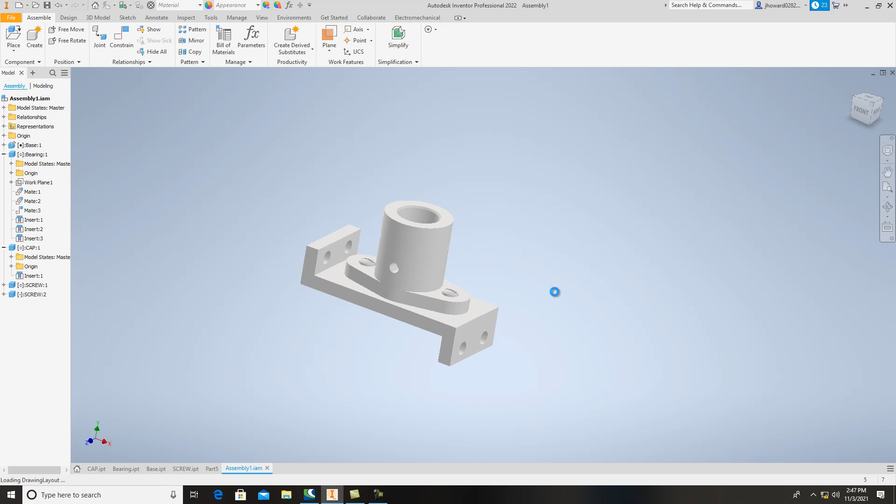And I bring it up here, and there is, of course, the paper it brings in. It's brought in a D size paper as default. Okay, I want a B size paper. All right.

And what you do is you come up here and right click on this sheet. There's Sheet 1. I want to right click on it, and I come down to Edit Sheet, and I want to change this to B size. Now with B size sheet, I don't need a name on it, but B size is okay. So I hit OK on that, and there's my B size paper.

I've got my zones on here and everything, so everything's looking good. This title block is really big. If I want to get rid of it, I can just right click on it and delete that. And you've got drawing resources up here, and I've got a title block. So I just go get a regular size ANSI A instead of the large, and it works a little bit better. So I got more room.

With that, what I want to do is bring in that Inventor Assembly, the IAM. And to do that, you come over here to Base, and it automatically picked it up right off the bat. I didn't have to go get it.

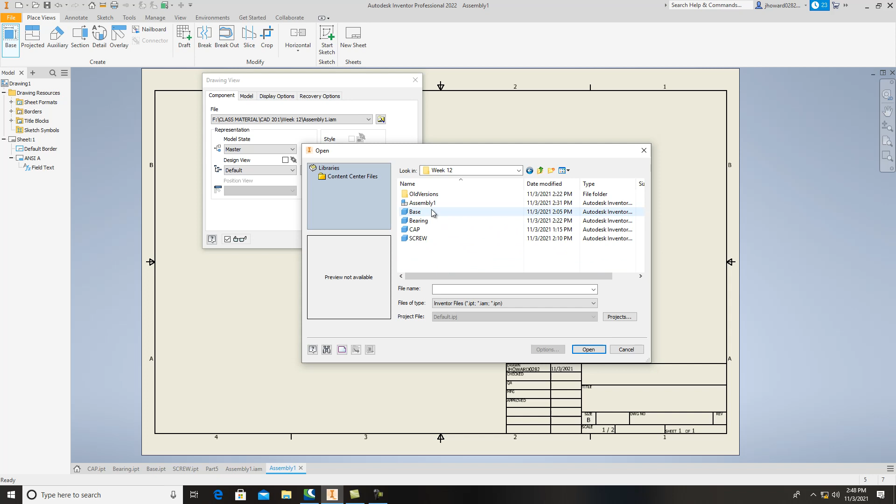But go here to my drive, keep everything nice and neat. And when I come down here, it was in week 12. Here's my assembly, open. And you can see it brought it in here just like that.

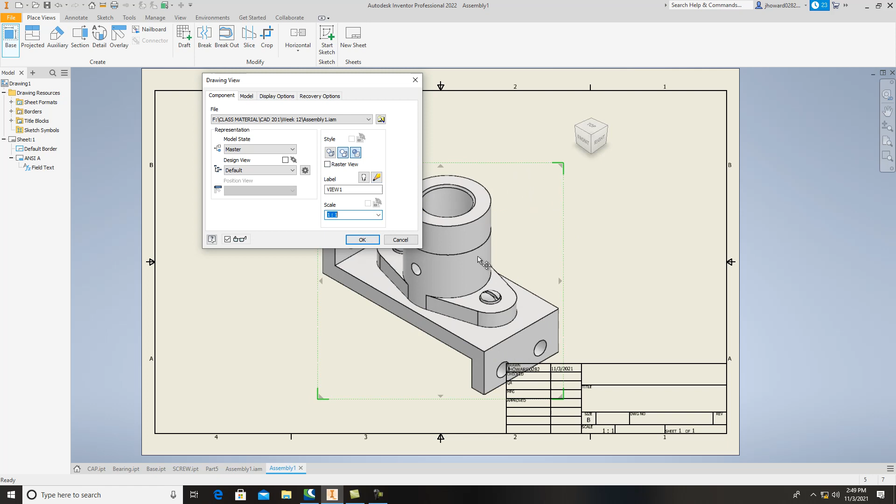It's perfect. What I want to do is turn it to isometric look. So I just turn it like that by clicking on my view cube. Looks good. I want to take and make it solid, shaded, just like that. And let's see if I go 1-to-1, see what it looks like. That looks pretty good. All right.

Then I can just take and move it wherever I want to. Now this is going to be my first page, and I need to put myself a, well, not necessarily on this one. We will in just a moment, but we'll leave this alone right here. And of course, you guys need to fill in your title box, and everything.

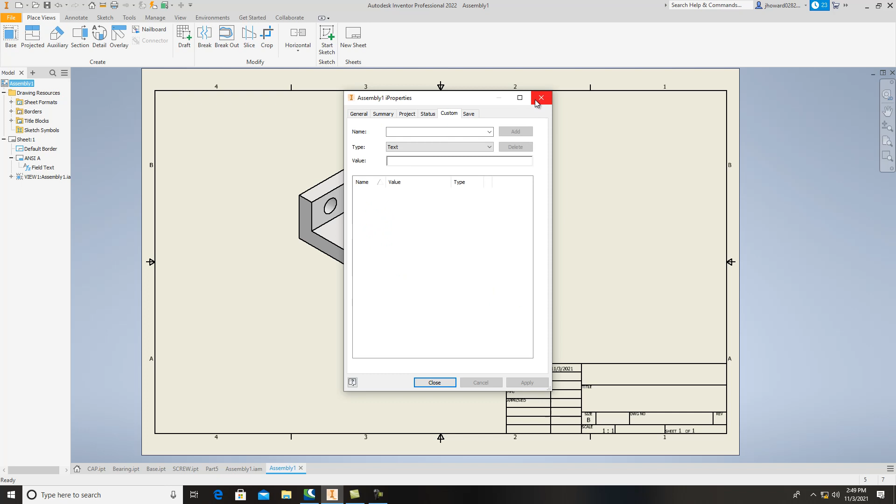You can right click on the assembly up here and go down to iProperties. And you can add in your title, your name, company, and all those things like that. The project number, stock. I mean, everything can be put into here, okay? And I definitely want you to put in the title for this and a few things like that.

So I'll leave that up to you to get all that placed in there. But for us, I want to add another sheet in this one, and I right-click right here, right on that top assembly, and do New Sheet, and it puts me in another one. If you'll notice now, here's Sheet 1, this is Sheet 2, and this is going to be my exploded view. My bill of materials will be right here.

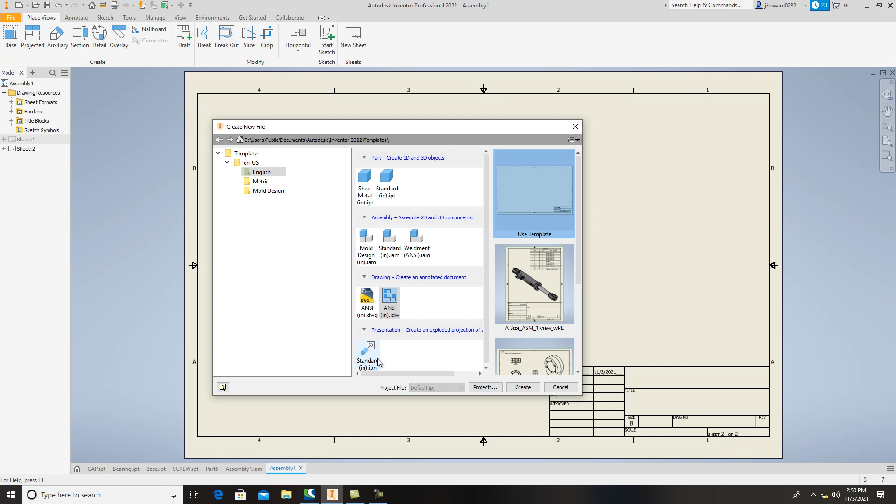To do that, I'm going to have to go in here and go File, New, English, and I want to do an IPN. Well, I double-click IPN, I can go in here and first I got to find an assembly that I have, and it's going to be the one that we just made. So come in here, have yourself organized really well so you can find it really easily.

Here's my assembly. I bring it in just like that. Boom. Now what I want to do is come in here and do what's called tweak components and show how this thing's actually assembled.

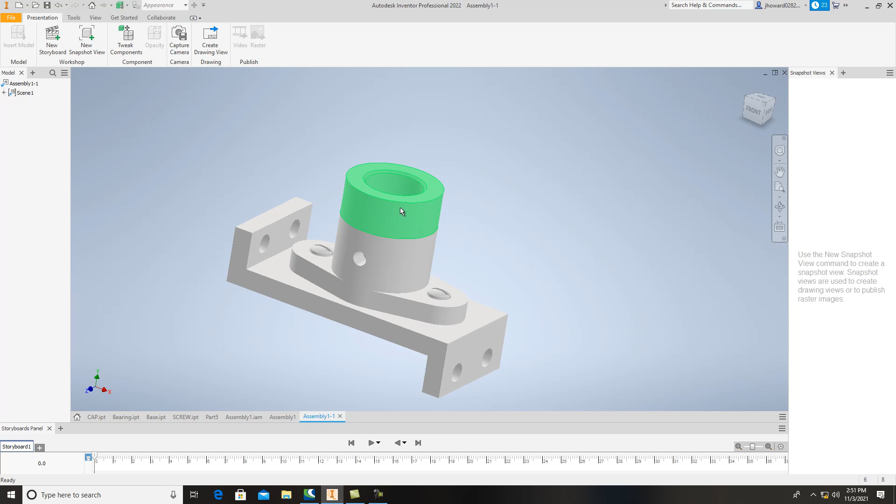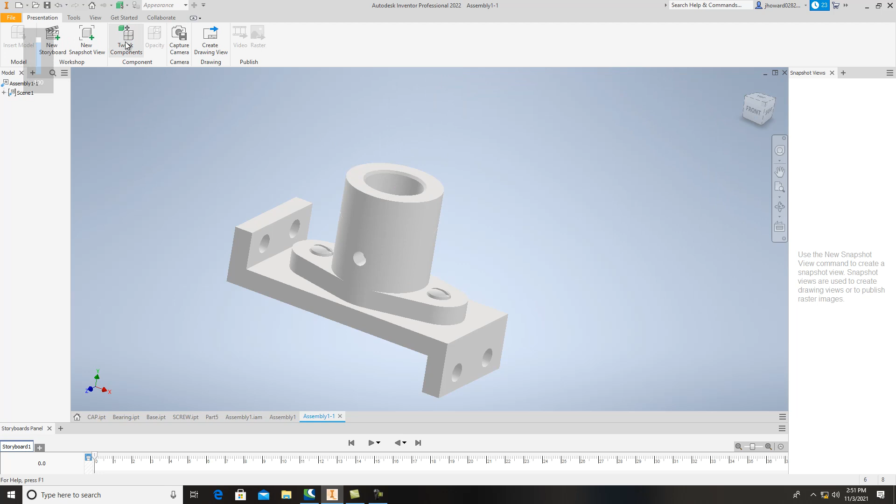Okay? And what I do is first I'll grab this, I'll hit tweak component, and what I want to do is you actually got to click on the components you want to tweak, but also you can grab your grips here and you can move them up, which I didn't like the way that did that. So hit tweak component again, click on the component.

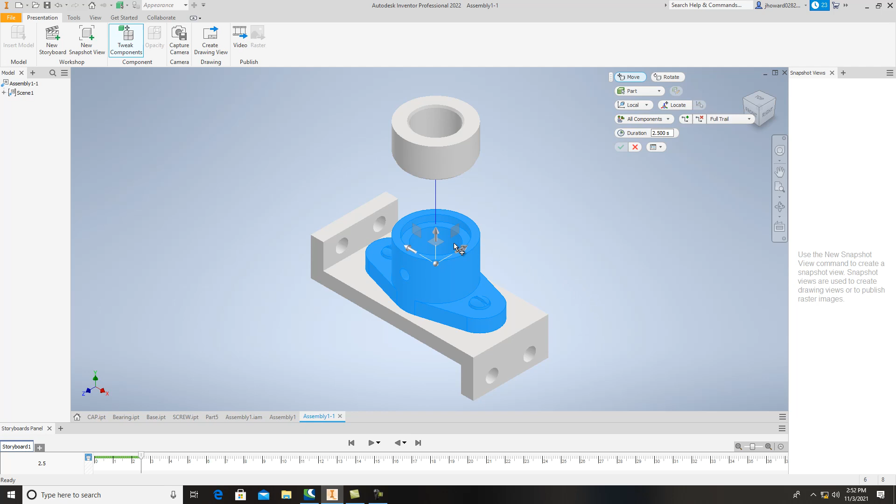All right, grab the arrow and see how I'm pulling that up, and then I want to turn it isometrically. You got to grab the arrow and pull that up. That's perfect, so I click on that. The next thing I want to tweak is this, but I also want to add in my screws, so you have to hit Control and add those, and then I'll grab and pull this up as well.

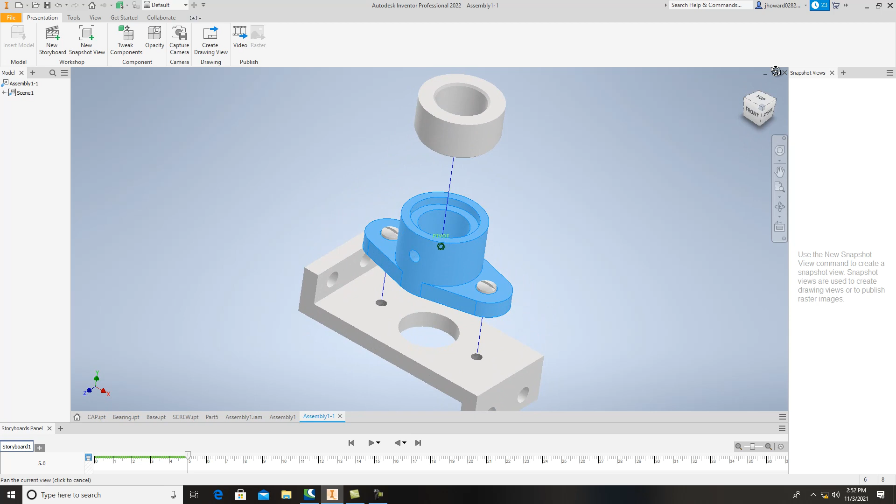Just like that. Now this needs to come up just a little bit further. Okay, so I hit my check mark. I can click on this now. It's already been tweaked, but you can actually click on the line, and I can pull it up a little higher. And we can also pull. I think that actually looks pretty good.

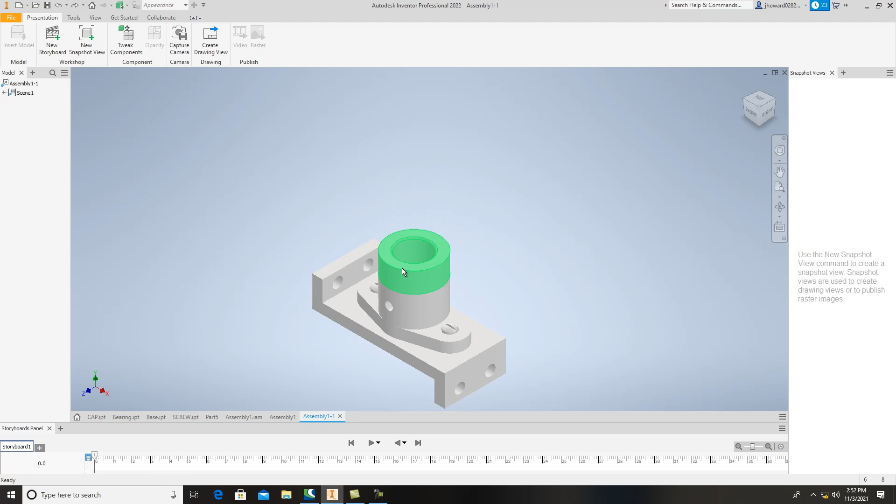Now the next thing I want to tweak is these screws out. And really I should have pulled those out first as this come up, so we can actually fix this. Let's go back and fix that. I'm just undoing back. When I pulled and tweaked this out, I should have grabbed these at the same time and pulled those up like that. And then check mark, I like that.

Tweak. Now I grab this, and then I pull this one up afterwards to about right there. Now I'll save this. That's how we assemble it. And this would be my Assembly1-1.ipn save.

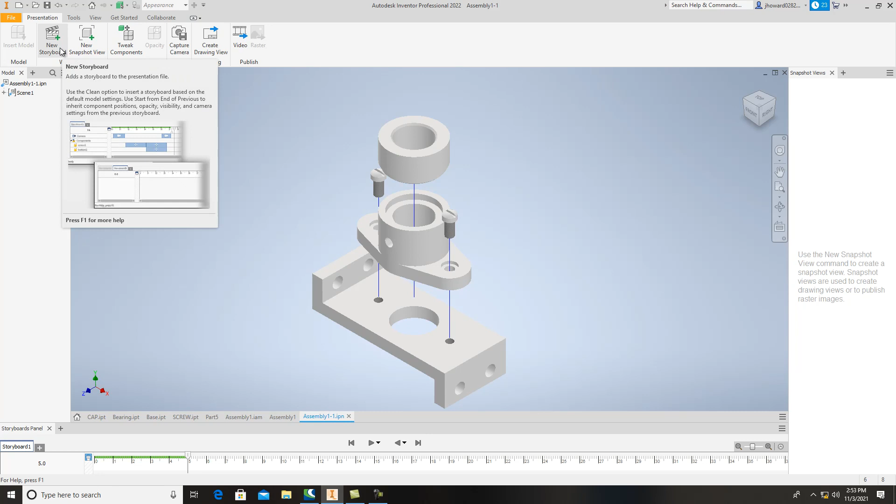And check this out, we can make a video of this, which is really cool. If you come up here, you can actually make yourself a video by clicking video.

This is where we're going to name this one. We'll call this one the assembly. Okay, where's it going to take it to? I want to take it and put it right into where everything else is located, in 201. Come down to week 12 and select folder, and then I want to hit OK on that.

And it's publishing a video right now. It's making a video of this thing being put together and then actually going through the processes of being disassembled. So let's take a look at the video real quick, it'll take just a second.

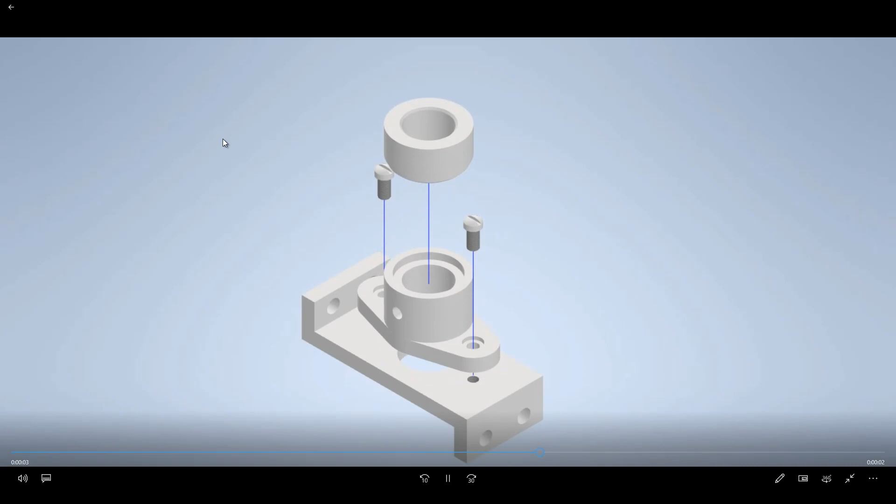If I come in here, I go to where I had it saved at, and it's 201. And right here is my... whoop, that is not what I wanted. Here's my video, and check this out, let's see what kind of quality it is. Not bad, you guys see that? There's your video, so you'd be showing someone how to actually disassemble or assemble that.

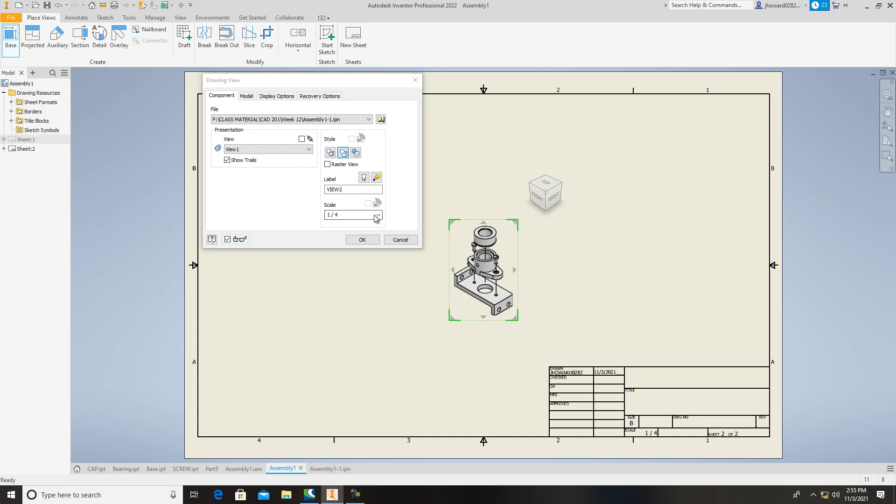But so we got this saved, and now I want to come back into my original drawing, and I want to bring that in, that IPN right here, and it was already there and already saved. I'll turn it to isometric. I like that, and we're going to blow it up a little bit in our scale, make it look better. Let's see what 1:1 looks like. Oh, it's just too big, so we'll go to half scale, which is fine.

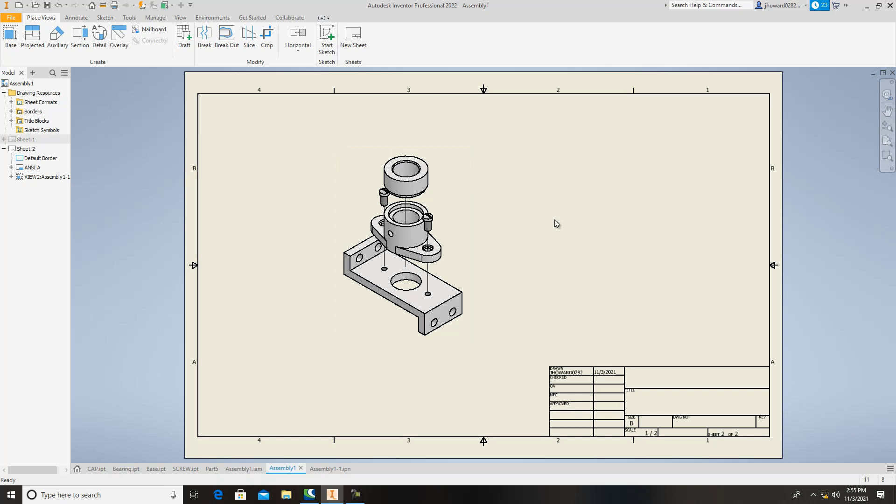And we're going to do a bill of materials on this. And if I click on this perforated area, hit edit view, I can go in here and I'm going to make it solid, I think it looks a little better. So now let's make ourselves a...

Parts list. And you just go to annotate, go to parts list. And when you're in here, you want to select the parts. And okay, bill of materials view is disabled, okay, just hit OK on that. And bring this over, I'm going to drop it right there. So it automatically knew when I clicked on the assembly what parts are what, and whatever you save those as is what the parts names come in as, okay?

And you can put the descriptions over here. So really, that looks like everything that I want on here, but if you want to edit it, you just click on there, right-click, and go to Edit Parts List, and when you get in here, you can click on that first one right here, the column chooser, and if there's some other things that you want to add, see right, we just got the 4 items right here, but if there's anything else you want to add, you can do it right here. You know, maybe you want to add in a vendor, click on vendor and hit add, okay?

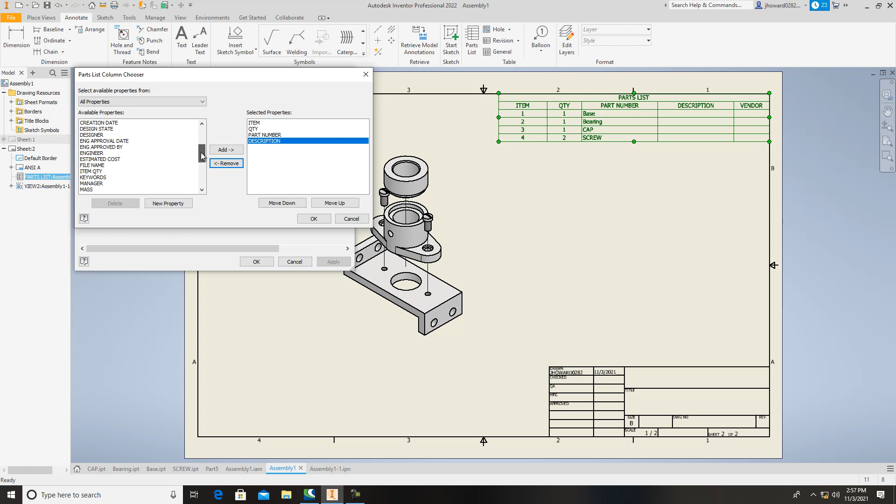When I hit okay and apply, it automatically puts the vendor in there. That looks really good, and we can add stuff as we need to. So right here in description for the base, one thing I'd really like to have is material information - what kind of material is this. I want to remove that and come up here since that's a very important thing, knowing what type of material it is. Okay, and then hit OK.

Now you notice it says generic, because none of these parts have been assigned a material. We can change that. Let's say, for instance, this base right here is aluminum.

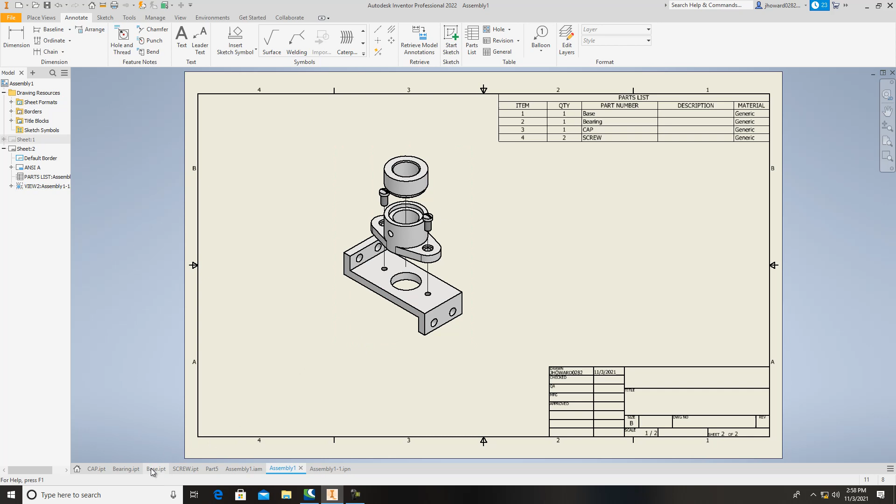We can just come in here, open up our base - it's already open, or you can do File Open. If you go up here to Base, right-click, go down to iProperties, we can go into Physical, and add in a material. We said aluminum - let's just do a 6061 aluminum. Apply, close, and save.

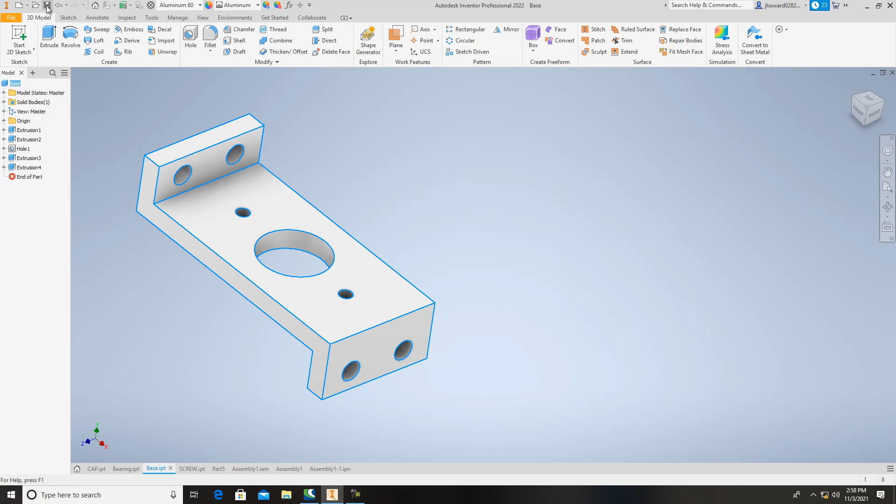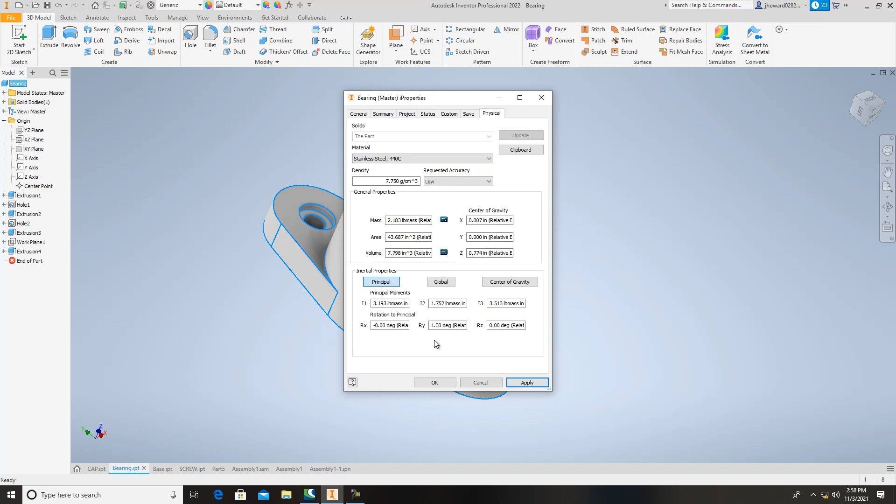The bearing itself, right-click on it. We can go up here to iProperties and go to Physical. I want to change this part to stainless steel - we can call it 440C. Apply, close, and save. Make sure you save those.

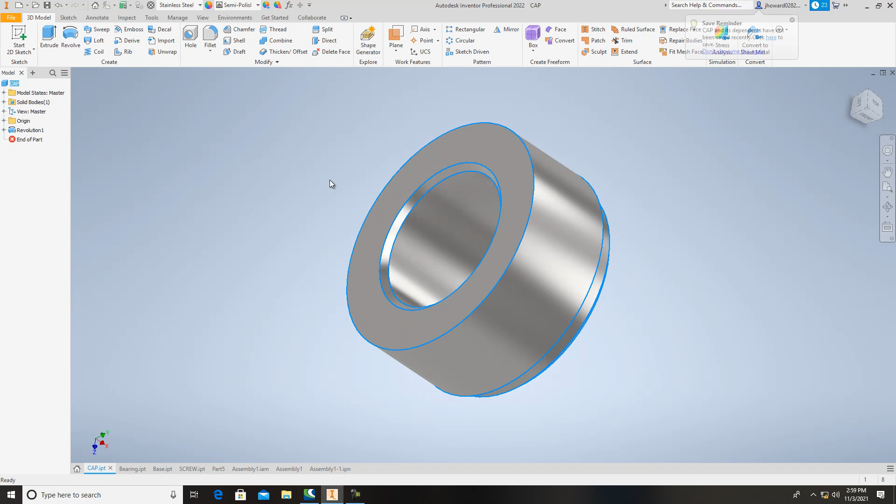The screw, I'm not worried about that one right now. The base, the cap - we'll make the cap out of stainless steel as well. Right-click, iProperties, Physical, and come down to stainless steel. Apply, close, and save. And you can see it gets the color of that too.

So when I come back over here to my assembly, see how it updated? Aluminum, 6061, stainless steel. This is a very, very smart software.

So whenever you do this, your material is already saved, and you can actually grab and pull the parts list - you see what I'm saying? You can draw it in closer if you don't need all of that room, so it saves you a little bit of space if you want to put description in or however.

So once you get all of this in, we need to put balloons on here - just click on balloons. You can do an auto balloon, but I just like doing them individually. You click on it - it's smart, it knows. Right-click and continue.

Number 3 is the cap. It's smart - if you click on this, number 2, try to keep them in parallel to each other. It just looks a little better.

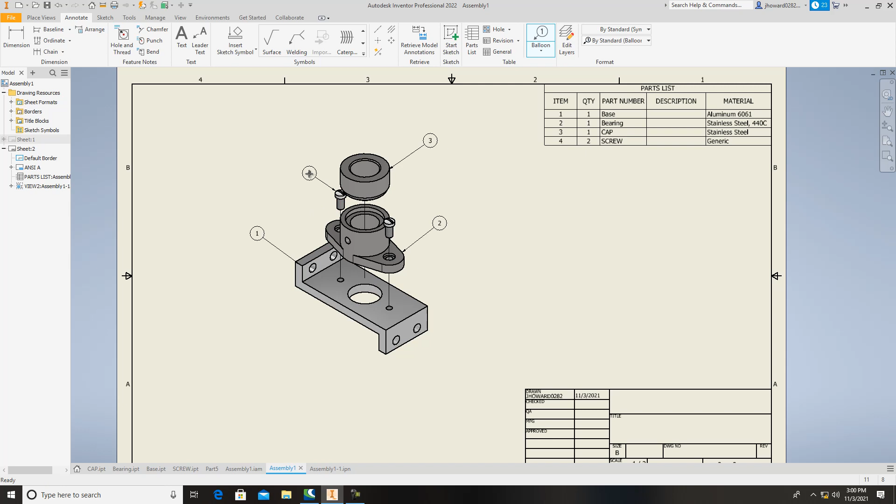And then the last one would be the screws - there's number 4, there's 2 of those. So really cool, so do that. We got that in there.

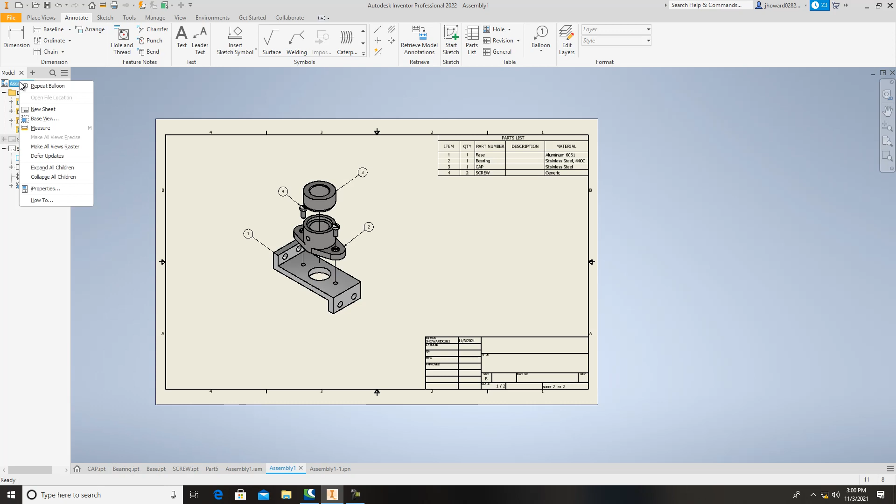Now, all you have to do on the rest of the pages is you're going to go in and make sheets for your cap, your bearing, your base, and all that. So again, right-click up here at the top and go New Sheet.

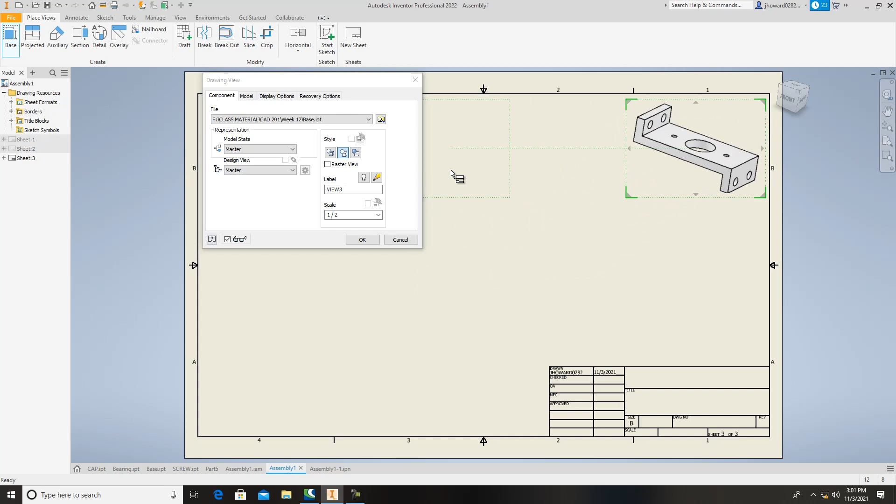This one I want to bring in my base - Place View, Base. I want to come in here and pull in the base, and put it up there with the solid, just the isometric view of it. Then I'll bring the base back in, and then I'll do my orthographics, and turn it to the front there.

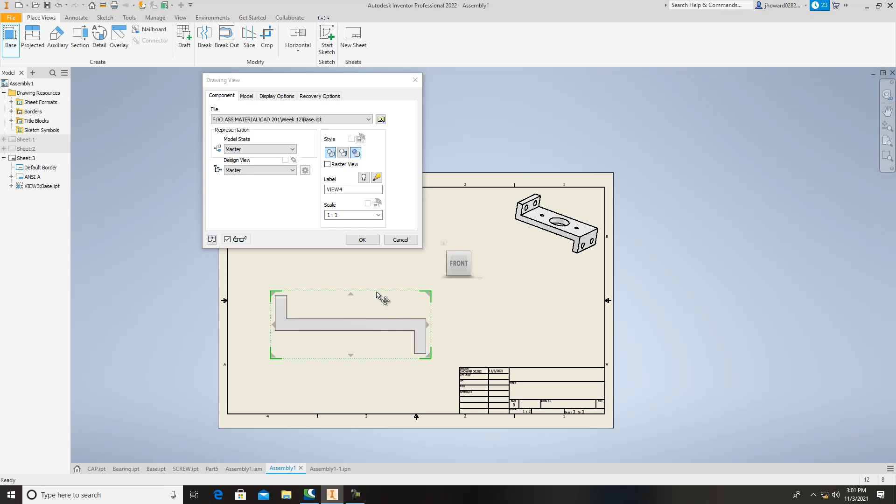And I can do this 1-to-1 on this - should be able to have enough room. So there's that. And if you hit projected up here, you can pull it to the side. Right click, create, and I can do the top, project.

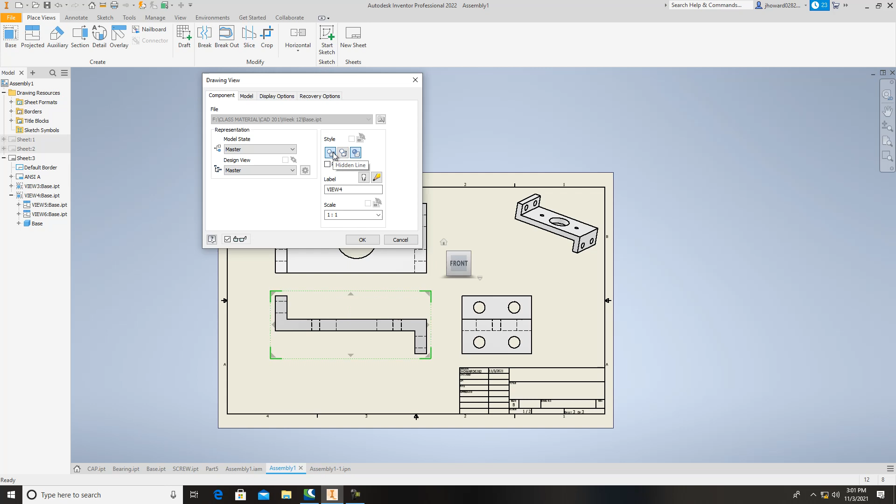And then what I need to do is I don't need these to be solid. So you go back to the one that you originally started with, right-click, go to edit view, and when you get in here, you can go back to a hidden line and take off solid. And that way it looks just like that.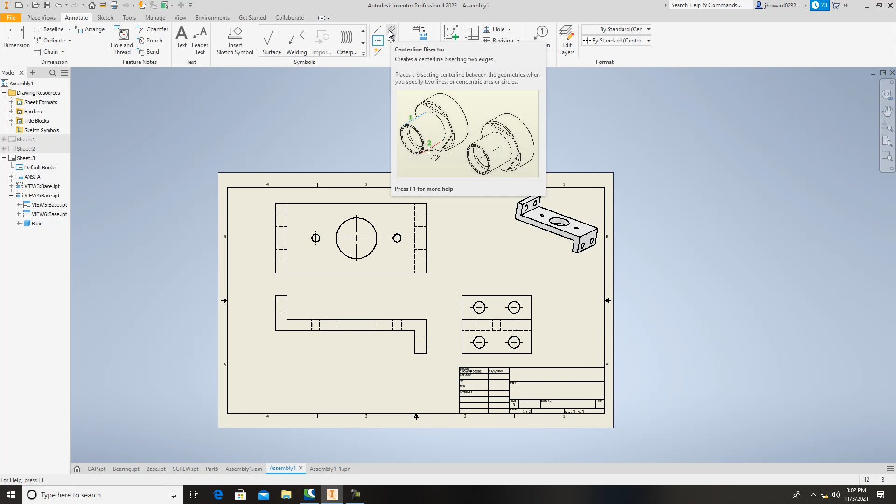And then you want to go in and do all of your dimensioning on it. Don't forget, annotate - don't forget to put those center marks where your holes are. Anything that's got the hole, you got to put a center mark. Here's holes that's going through this way - you put a center line bisector in, and you just click on one line, and then click on another.

Y'all see that? You do that for everything, and then you dimension everything that shows your height, depth, and width. Make sure you get all those dimensions in for someone to make this.

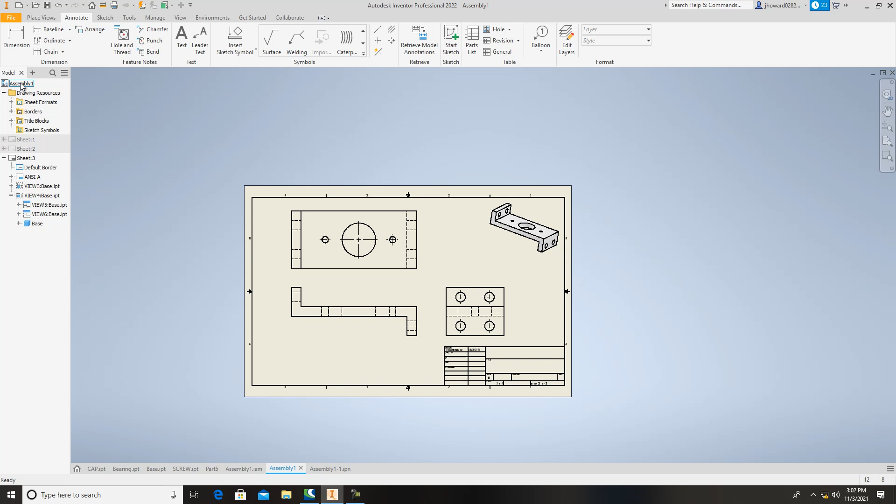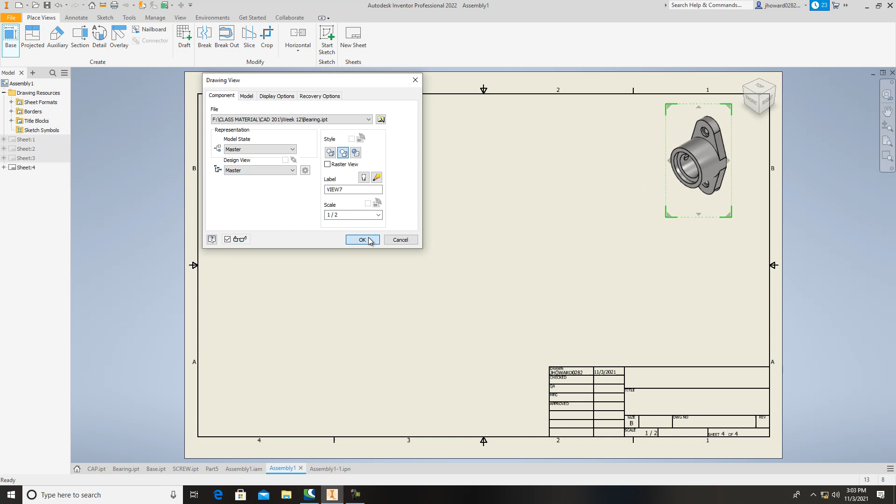So we get all this in, right-click, new sheet. This time I'm bringing in my bearing. On the bearing, again, I like to put an isometric view up here in this little corner. That's really small, let's go to 1/2 scale on that. Beautiful, looks good. Again, I want that to be solid, so I'll put that in.

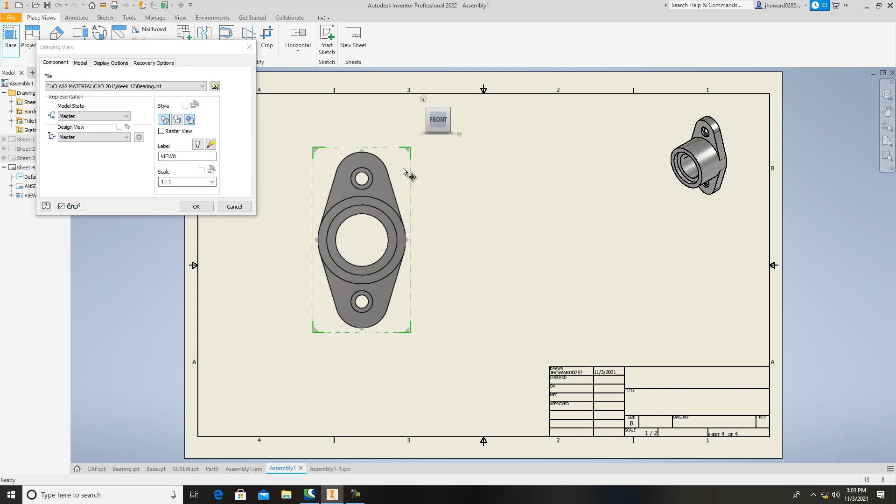And now, base view, I come back into it, and I want this to be in the front. I want it to be 1-to-1. I only need 2 views in my orthographics here. I need a front view, and I'm going to do a section view on this so you can see the interior of it.

So for a section view, you click on it, you get lined up in the center, bring it straight down, right click, continue, and then you bring it over. There it is. And then I need to make sure that this is not shaded, so it's going to look something like that.

And this one the same way, I don't want it shaded, I want it just like that. So looks pretty good there. Go ahead, make sure you put all your center lines in and then put all your dimensions in.

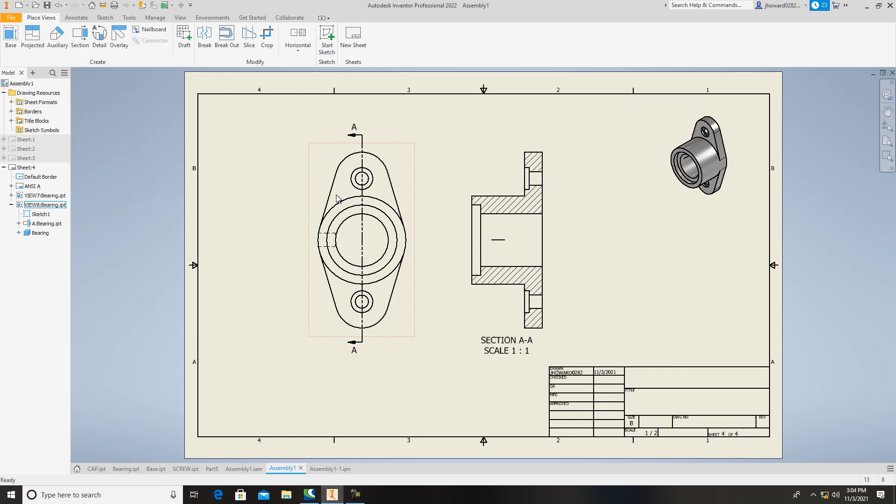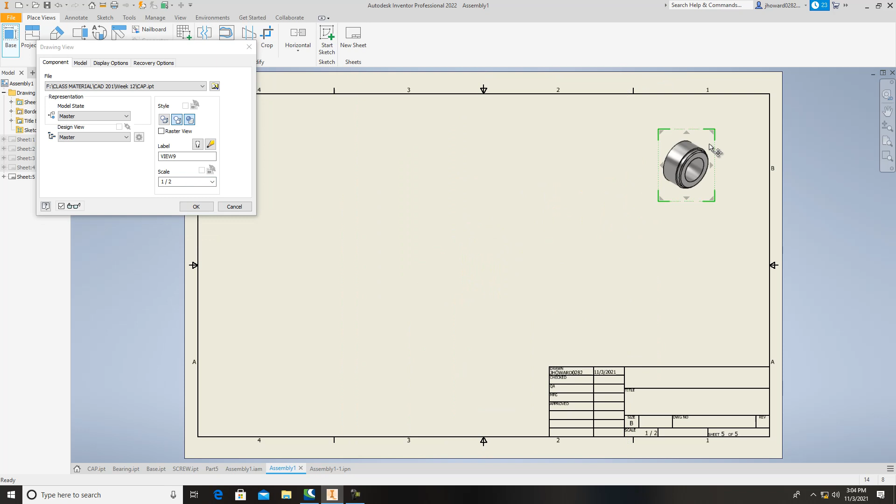Next, I want to go in and grab the last couple of components. Before I do that, I have to go in and make another page. Right click here on assembly, new sheet, base, bring it in. It's going to be my cap. Open and turn it like that. Bring it up here, I want to make sure it's on solid, about 1/2 scale. Bring it in here up to the top right.

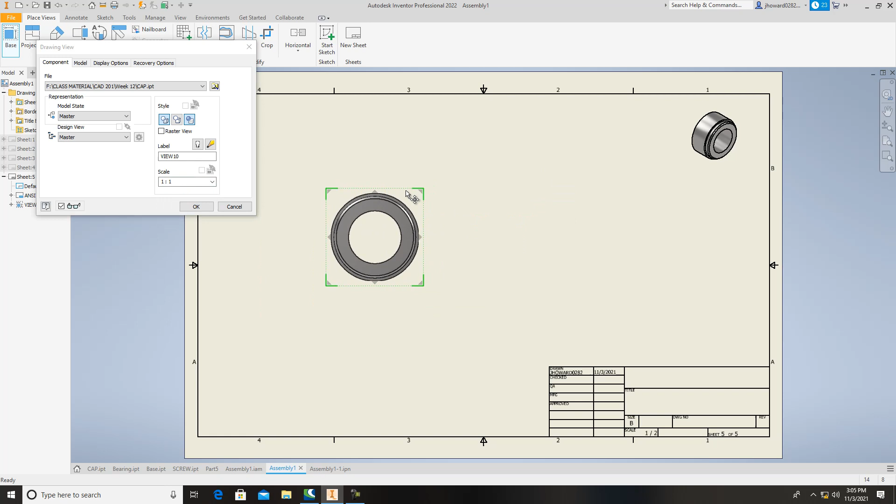And then we'll bring the rest of it in on orthographic. I'm just going to do a front view and a right side view of it. Turn it around, and let's do 1-to-1 scale on that. I think we'll have enough room, put it there, okay on that. And again, I don't want that shaded.

So when I do my section view on this one, find the center of it, straight up, continue, bring it over. Put all of your dimensioning in on this one.

And then the final one, you'll go in and you'll have your screw. Or you could have room on here and split the page for your screw. Now if you want to split the page, you do start sketch, get you a line, and I'll catch this point right here. It don't catch, but you get it really close to it. Eyeball it in there where it's touching that line.

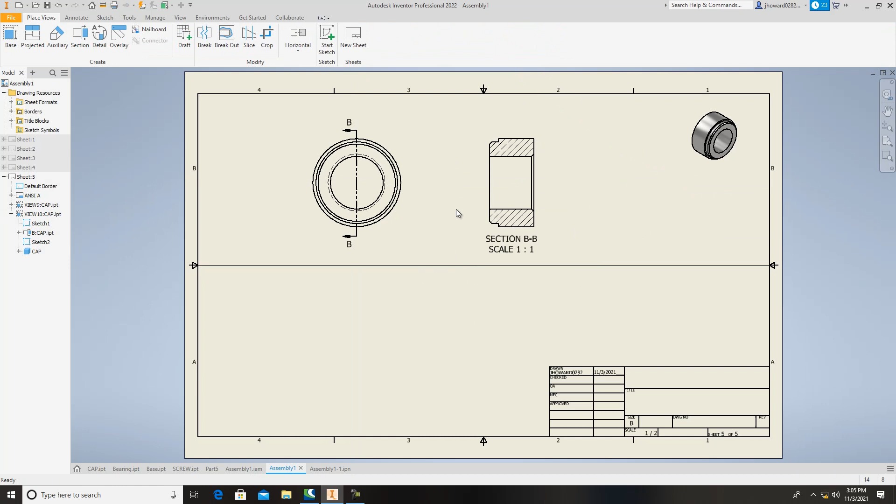Finish sketch, and it puts a line in there for you. Just make sure that you denote in here what this part is, just write it in here. And then down here, you can bring in that final component, which is the screw. Okay, and you bring it in, 1-to-1. Bring you a shot of that in there. You can bring that there, however you want to do it.

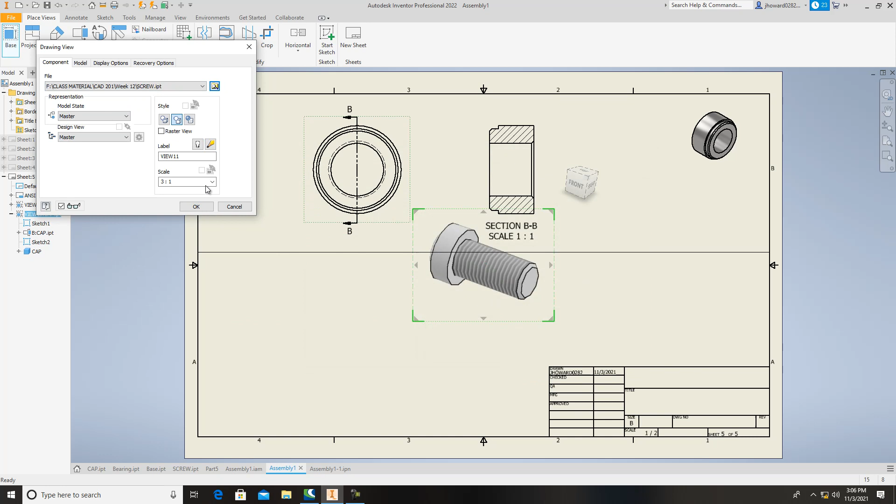And then come down here and add in the information that you need to add in there for your orthographics. There we go. And you can double click, you don't have to right click on those for the views to work.

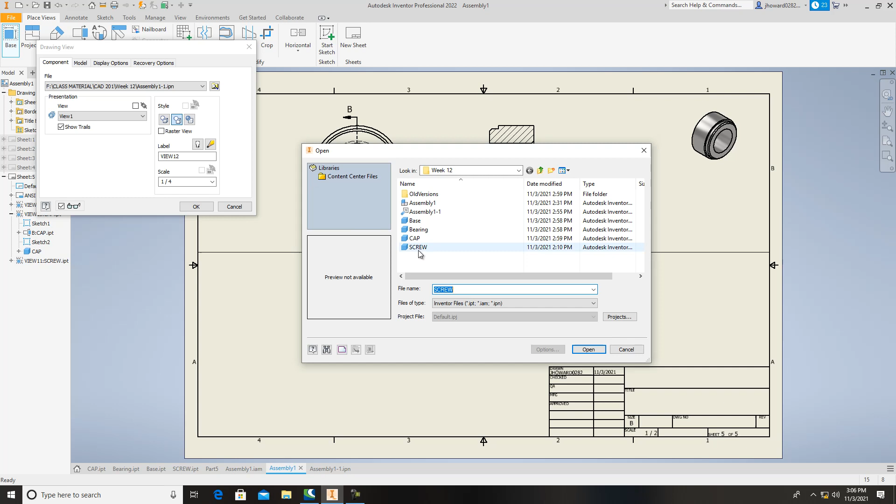And then again, I'll bring it in and we'll do a little orthographic work on it. Turn it to the front, we'll be fine, we'll put it down here. It's good, then we'll project a shot over. Okay, and again, if you double click it, it gets you in here too. Take off the shaded.

And you can go in there and make sure whenever you're annotating these, like the thread, you've already got that in there. You can go to hole and thread and just click on it, and it'll automatically bring it up. So smart software. So again, you'll notice you've got 5 sheets.

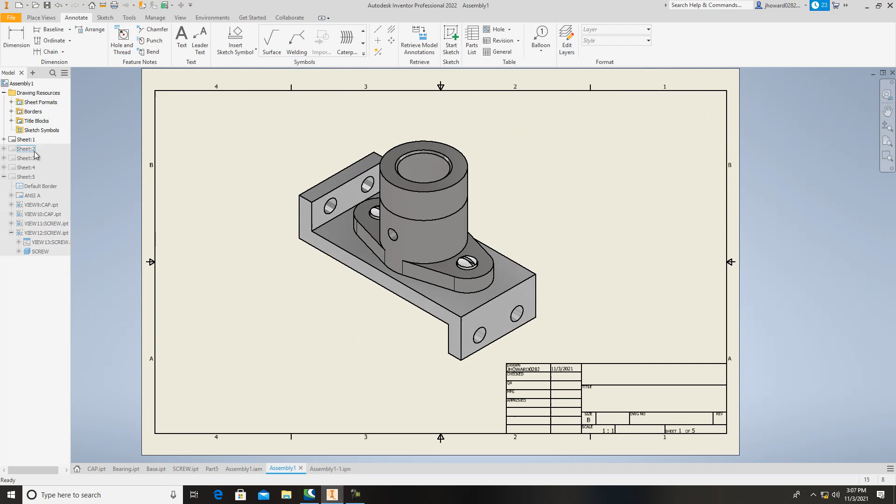There's sheet 1, sheet 2, sheet 3, sheet 4, and sheet 5. And I want you to dimension all this accordingly, so that this assembly can be created and made. Okay? So if you need any help with this, just let me know.